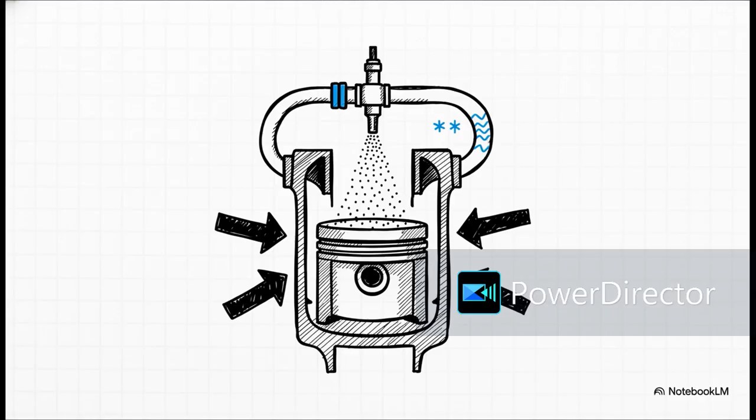Now, to shatter those thermodynamic boundaries, we have to deploy some truly aggressive enablers. We're talking about 500-bar direct fuel injection systems just to achieve micron-level atomization. We need geometric compression ratios pushing past 15:1, and to manage the severe knock limits and that pesky early ignition at those extreme pressures, we have to utilize deep, low-pressure EGR. We're essentially pushing exhaust gas recirculation rates up to 30% just to cool the combustion chamber and suppress NOx formation. It's intense engineering.

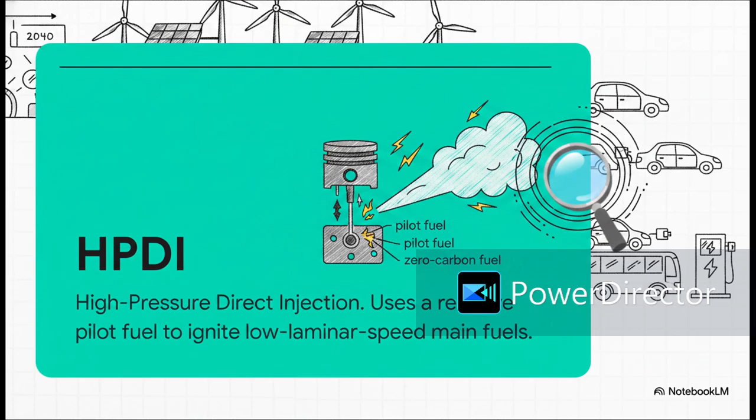Let's shift gears to Section 3, zero-carbon engine evolution. If we're really shifting to zero-carbon fuels, the absolute game-changer here is HPDI, or high-pressure direct injection. This is a breakthrough technology that we absolutely must have to overcome the exceptionally slow flame propagation speeds of alternative fuels. Basically, you inject a tiny amount of a high-reactivity pilot fuel, like diesel, to act as a sort of liquid spark plug. It auto-ignites, creating these high-temperature jets that reliably ignite your main zero-carbon fuel, whether that's ammonia or methanol.

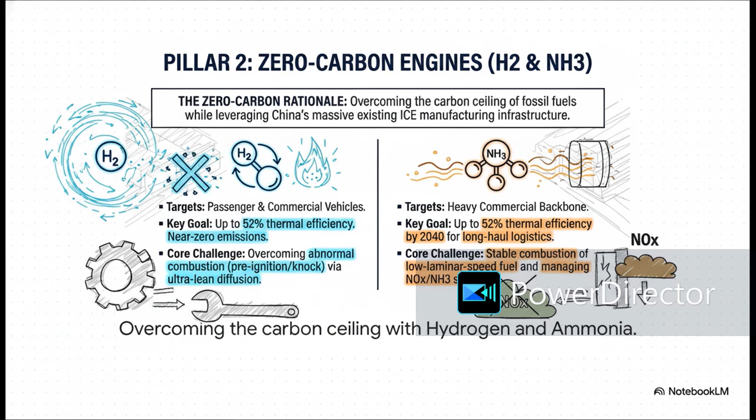Now, hydrogen and ammonia present some incredibly distinct, tricky engineering challenges. Hydrogen demands ultra-lean diffusion to overcome its super-low ignition energy. If you don't get that right, you're looking at severe pre-ignition and backfires, not to mention having to use specialized alloys to stop hydrogen embrittlement. Ammonia, on the flip side, requires us to master the stable combustion of a very low reactivity fuel. Oh, and you have to strictly manage toxic, unburned ammonia slip and N2O emissions. Not an easy task, right?

The evolution path for these zero-carbon engines is actually incredibly clear, and it's moving fast. Phase 1 is mastering port fuel injection, but by 2040, the ultimate limit will be achieved by combining that HPDI technology with stratified ultra-lean combustion and seamlessly integrating liquid hydrogen storage directly into the commercial vehicle chassis.

All right, Section 4, the automotive lightweighting trinity. R&D leaders are facing a massive weight paradox right now. Think about it. Batteries give us range, but their mass takes it right back. Aggressive mass reduction is absolutely no longer just a nice little cost-saving measure. It's a foundational, non-negotiable physical requirement if we want to preserve dynamic range, handling, and commercial payload capacity. So, how do we solve this?

The roadmap prescribes what we call a trinity approach. Structurally, we're shifting away from isolated components toward holistic cell-to-chassis, or CTC architectures, where the battery case itself actually provides the core torsional rigidity. Process-wise, we're using high-yield gigacasting to replace hundreds of individual stampings with single aluminum nodes. And tying the whole shebang together, AI-driven generative design that mathematically strips out literally every single gram of unnecessary material.

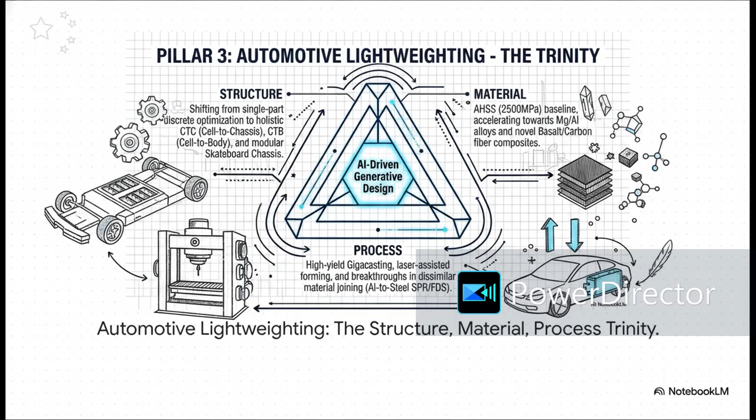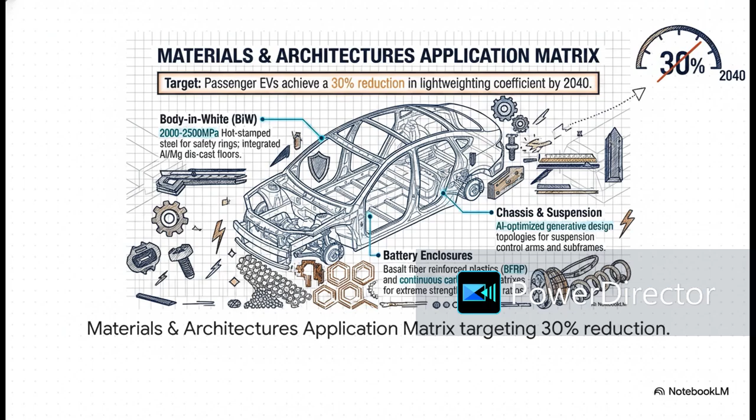When we look at the future body in white, we are targeting a massive 30% reduction in the lightweighting coefficient for passenger EVs by 2040. To hit that, we're applying 2,500 megapascal hot stamp steel for the safety rings. At the same time, we're integrating novel basalt fiber reinforced plastics alongside continuous carbon fiber matrices to get these absolutely extreme strength-to-weight ratios in our battery enclosures.

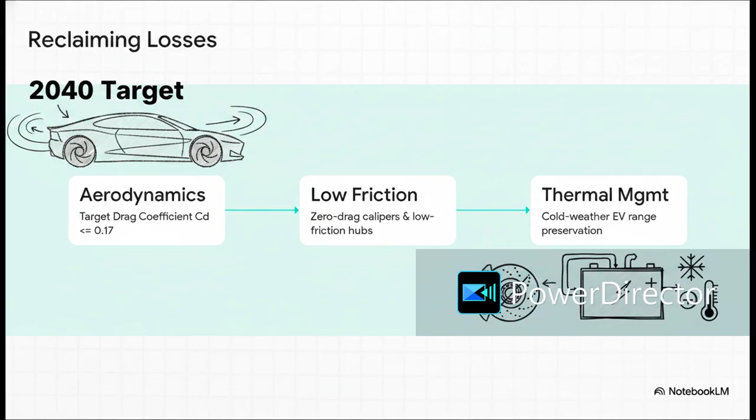Let's move to Section 5, Systemic Vehicle Energy Saving. We have to sequentially attack every single parasitic loss across the entire vehicle envelope. And honestly, the 2040 targets are staggering. We are aggressively pushing aerodynamic drag coefficients down to 0.17 or even lower. We have to integrate ultra-low friction hub bearings and zero-drag brake calipers that have a drag torque of less than 1.5 newton meters. And fundamentally, we've got to completely rethink thermal management to finally stop that awful cold weather range degradation.

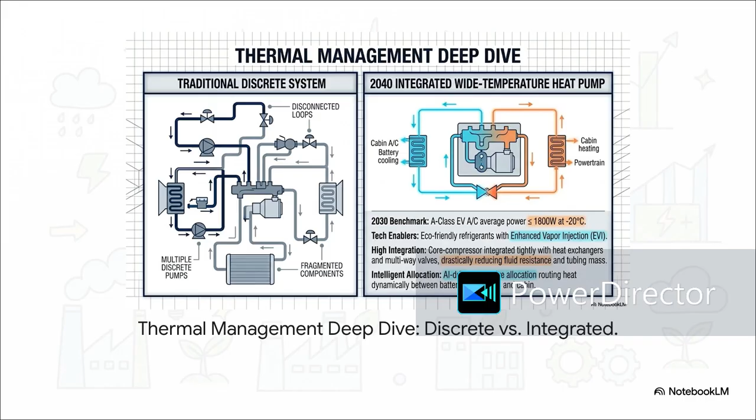The industry is rapidly abandoning those old, fragmented, discrete cooling loops. Instead, we're moving toward highly integrated, AI-driven, wide-temperature heat pumps. By using multi-way valves like an octavalve and eco-friendly refrigerants, the system dynamically scavenges low-grade waste heat from the powertrain and actively routes it to the cabin or the battery. This is exactly how we're going to push cold-weather AC power draw well below 1,800 watts.

And finally, Section 6, Ecosystem Synthesis Imperatives. Look, hardware optimization eventually hits a physical ceiling, right? But think of the 2040 paradigm like an infinity loop. The first three pillars we discussed, powertrains, zero-carbon engines, and lightweighting, they establish the absolute physical capability limits of the chassis. But then, the Vehicle Road Cloud, or V2X software, steps in as the ultimate multiplier. It dynamically extracts maximum utility from that hardware by predicting traffic, optimizing routes, and managing thermal loads in real time.

It's brilliant. Consequently, R&D leaders, you have to pivot. You have to shift your focus from isolated component efficiency over to domain-fused AI platforms. You've got to aggressively invest in multipath infrastructure because pure EV is simply not the sole endgame. And crucially, you have to master the hardest engineering challenges found right in the seams. Things like joining dissimilar materials, say cast aluminum to ultra-high-strength steel, without causing galvanic corrosion. That is where the real battle is won.

Let's wrap this up. As energy saving transforms from a localized, mechanical task into this massively interconnected digital and physical ecosystem, I want to leave you with this final thought. Hardware sets the baseline, for sure, but software is the multiplier. So, are your engineering architectures truly prepared for the 2040 realities?

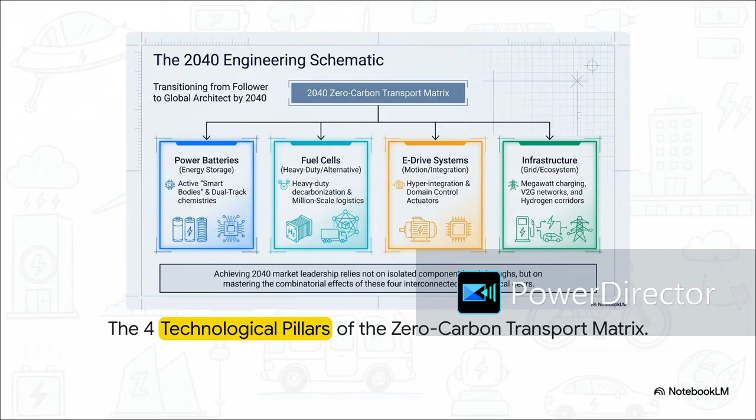To tackle something this massive, we're going to apply a strict MECE framework, mutually exclusive, collectively exhaustive. We'll hit 4 specific pillars: power batteries, fuel cells, e-drive systems, and infrastructure. And then we'll tie it all together by looking at the ultimate 2040 ecosystem convergence. This matrix is basically your blueprint. It visually drives home the point that achieving market leadership in 2040 relies entirely on mastering the combinatorial effects of these 4 interconnected gears. You can't just win at battery chemistry and drop the ball on grid integration. The zero-carbon transport matrix demands simultaneous mastery across the board.

All right, let's start with Pillar 1, power batteries. This is where the strategic mandate forces us into a really fascinating dual-track paradigm. The divergence here is just stark. The industry isn't chasing one single, unified goal anymore. On one track, we're pushing solid-state chemistry to its absolute physical limits. We're talking energy densities well over 700 watt-hours per kilogram. But on the flip side, on the cost-effectiveness track, the mandate is to ruthlessly crush costs down to under 0.30 RMB per watt-hour by hyper-optimizing liquid lithium-ion systems.

It really makes you stop and ask, where exactly does your current R&D pipeline fit into this split? Now, tracking that high-density route requires a highly specific, multi-step material evolution. We're stepping away from today's liquid NCM and graphite setups, moving into a semi-solid integration phase that relies heavily on lithium-rich manganese and high-capacity silicon carbon anodes.

And then, finally, by 2040, we fully cross the threshold into all solid-state systems utilizing pure lithium metal. This timeline is dictated purely by material physics. For example, hitting an ionic conductivity above 2.0 × 10^-2 S/cm for sulfide-based solid electrolytes is literally the physical gateway. If we don't hit that exact material metric, those 2040 solid-state targets remain nothing more than a theoretical fantasy.

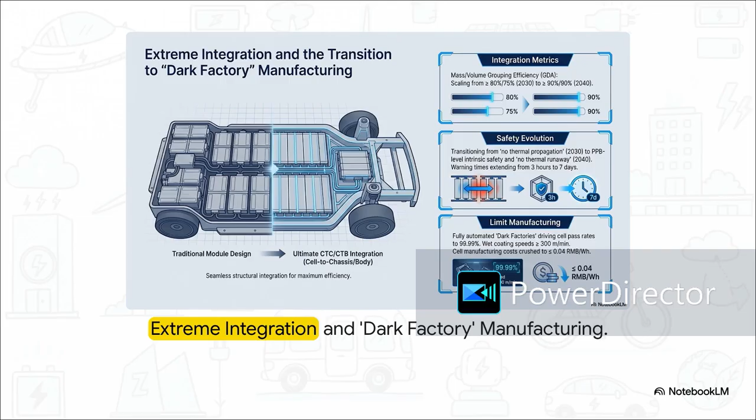Switching gears to the high cost-effectiveness track, it's not really about chemistry. It's all about extreme packaging and next-level manufacturing. We're aiming for 90% mass and volume grouping efficiency through pure cell-to-chassis integration. And to hit that staggering 0.04 RMB per watt-hour manufacturing cost, you've got to rely on fully automated dark factories. We're talking lights-out operations, blazing fast speeds, and a 99.99% pass rate.

Moving on to Pillar 2, fuel cells. The roadmap is crystal clear here. This is our endgame specifically for heavy-duty commercial decarbonization. Hydrogen isn't some blanket fix. We are isolating it for those brutal, continuous operation logistics corridors, where heavy batteries would totally kill your payload capacity.

For a 49-ton heavy-duty truck, the 2040 targets are wild. Over 4 million operational fuel cell vehicles, minimum 1,000-kilometer ranges, and pushing their durability to a 2 million-kilometer lifespan. Oh, and keeping hydrogen consumption strictly under 6 kilograms per 100 kilometers.

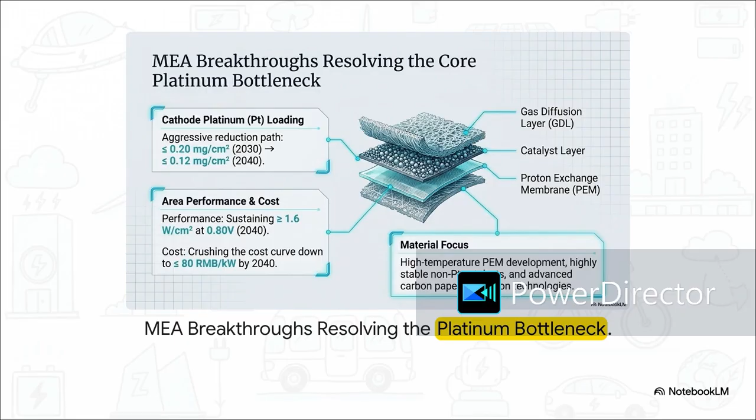To actually pull that off commercially, engineering teams have to crack the platinum bottleneck right at the membrane electrode assembly level. The mandate is a microscopic cathode platinum loading limit of 0.12 milligrams per square centimeter by 2040. To hit that, we're going to need massive advancements in high-temperature proton exchange membranes and totally stable non-platinum catalysts.

Let's tackle Pillar 3, e-drive systems. Here, we are witnessing a radical shift from standard mechanical packaging to pure silicon-level hyper-integration. Those legacy decentralized powertrains, they are officially dead. The future is entirely unified, multi-in-one domain control units. We're treating e-drives as silicon-level computational actuators now.

By leveraging multi-core microprocessors and wide bandgap semiconductors like silicon carbide, we're targeting a volumetric power density of 70 kilowatts per liter by 2040. It's honestly just like the leap we saw in computing decades ago, going from mechanical sprawl to incredible processing density. Mechanically, this translates beautifully into distributed drive engineering.

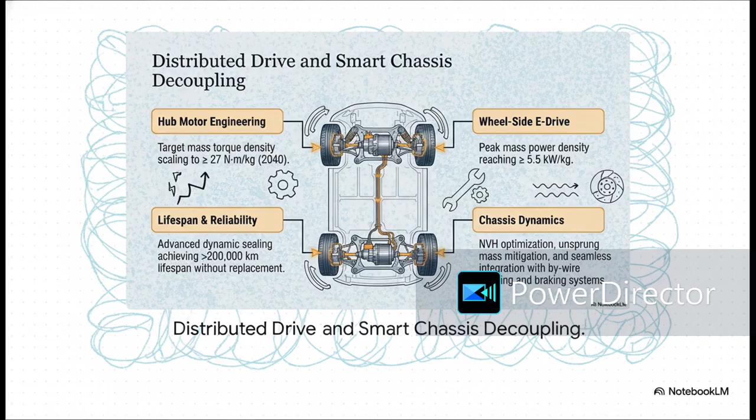We are pushing toward wheelside and hub motor architectures with mass torque densities beyond 27 Newton-meters per kilogram. This fully decouples the chassis dynamics, letting us seamlessly drop in by-wire steering and braking. Imagine the freedom this gives us. We can completely revolutionize vehicle handling and massively open up the interior cabin.

Our fourth and final standalone pillar is infrastructure. Get ready for the V2G revolution, where we stop treating EVs as a burden on the grid and start treating them as highly profitable assets. By 2040, we're looking at a very distinct dual-track energy network. On one hand, we're building massive hydrogen logistics corridors, deploying up to 20,000 targeted stations for heavy transport.

Concurrently, in urban environments, we are transforming standard charging piles into smart, bidirectional nodes. We are basically turning city grids into massive virtual power plants. The aggressive scaling mandate here is what you really need to take note of. Hitting over 80% vehicle-to-grid or V2G penetration by 2040 means fleets will automatically absorb off-peak renewable energy and shave those peak grid loads when demand spikes.

Your vehicles literally become prosumers, producing and consuming energy on the fly. They aren't just getting you from point A to B anymore, they're rolling power utility nodes. So having verified the requirements across all 4 pillars independently, let's move to our final section, synthesizing them into the 2040 ecosystem convergence.

It's glaringly obvious that the 2040 market is going to belong exclusively to whoever masters this exact convergence. The ultimate vehicle is no longer a hardware product, it's a software-defined node that seamlessly interlocks smart solid-state batteries, fuel cell networks, computational e-drives, and V2G infrastructure. Unifying that entire shebang with AI and digital twins, that is how we actually minimize the lifecycle carbon footprint at a macro scale.

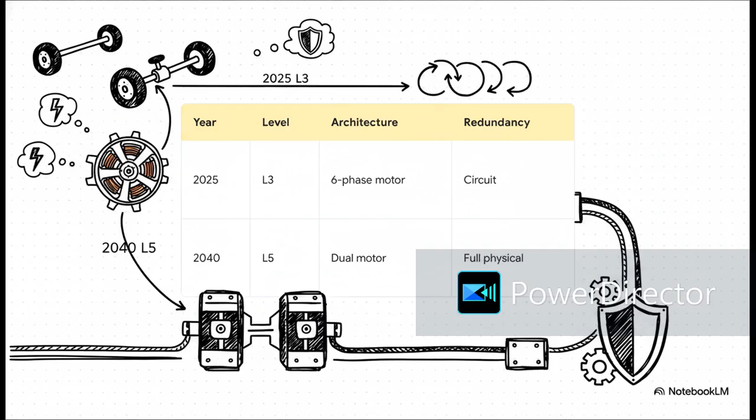Right now, looking at 2025 standards for Level 3 autonomy, a 6-phase motor with basic circuit redundancy does the job. But fast forward to 2040, aiming for full Level 5 autonomy, and the entire paradigm shifts. It demands absolute fail-operational capabilities. We are talking dual motors, totally independent control systems, and full physical and logical redundancy from top to bottom. It's a massive leap in engineering rigor.

Moving up the stack to Section 3, EEI, or the Electronic, Electrical, and Information Architecture, the central nervous system. We're tracking a really radical evolution in topology. We're actively moving away from the legacy distributed ECU model, where a car was essentially a messy network of 100 isolated black box computers. We transition to a central compute and zonal architecture by 2030. And the endgame for 2040? A fully vehicle cloud centralized architecture where massive computational loads are handled entirely elastically in the cloud.

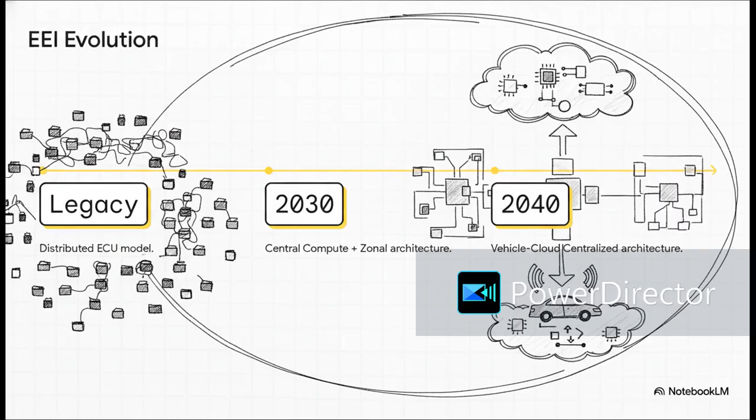Now, why does this matter so much to us as engineering leaders? What's the bottom line? It's agility. By structurally decoupling the hardware and software lifecycles through a service-oriented architecture, we completely shatter legacy development limits. By 2040, these fully virtualized networks are going to compress feature development cycles down to just 1 week via AI-driven agile development. You are literally going to be updating a 2-ton kinetic machine with the exact same speed and ease as updating a smartphone app.

Which brings us to Section 4, auto chips. These are the exponential silicon synapses providing all the raw computational horsepower. The gap between legacy chips we're used to and the 2040 requirements is honestly staggering. To support true in-car artificial general intelligence, we're demanding a compute threshold exceeding 2,000 TOPS. But as we all know, power means absolutely nothing without reliability. We are enforcing a strict zero-defect tolerance of less than 0.2 parts per million. Think about that. You are essentially engineering a world-class supercomputer and shoving it into a high-vibration, temperature-extreme oven.

Securing this kind of hardcore silicon ecosystem requires 3 absolute dependencies by 2040. Number 1, architecture autonomy. We have to establish open-source standards like RISC-V to break our reliance on proprietary instruction sets. Number 2, fabrication nodes. We need to master 22 to 16 nanometer embedded memory and advanced 3D packaging to get around the memory wall. And number 3, tool chain independence. We must completely transition to automotive-grade EDA tool chains.

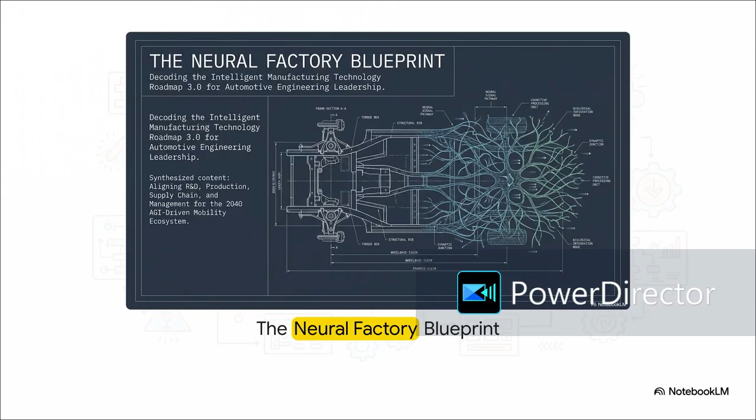Think of the factory as an industrial mother machine, literally a living, breathing entity. It runs on a continuous, bidirectional flow of data. The factory builds the smart vehicle, and then, boom, the vehicle's real-world telemetry data flows right back to upgrade the factory. It's a flawless, closed, symbiotic loop.

Honestly, if your current manufacturing architecture is still just messing around with basic networking, you are already miles behind the strategic curve. So, to really operationalize this for you, we're going to break it down using a top-down MECE approach. That's mutually exclusive, collectively exhaustive. We'll hit 1. Genesis and governance, 2. Physical realization, 3. Value network, 4. Market and sustainability, and finally, 5. Synthesis and strategy.

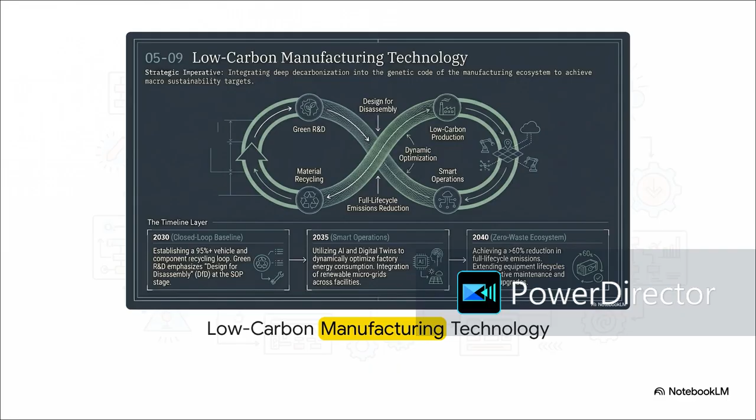All of this ladders up to a massive quantifiable mandate, a greater than 60% reduction in full life cycle carbon footprint by 2040 compared to 2024 baselines. And listen closely, that is full life cycle. We are talking Scope 3 emissions here. You can't just slap some solar panels on your factory and call it a day. You have to architect a fully carbon-accountable supply chain, utilizing PLM systems and blockchain verification to guarantee absolute auditability.

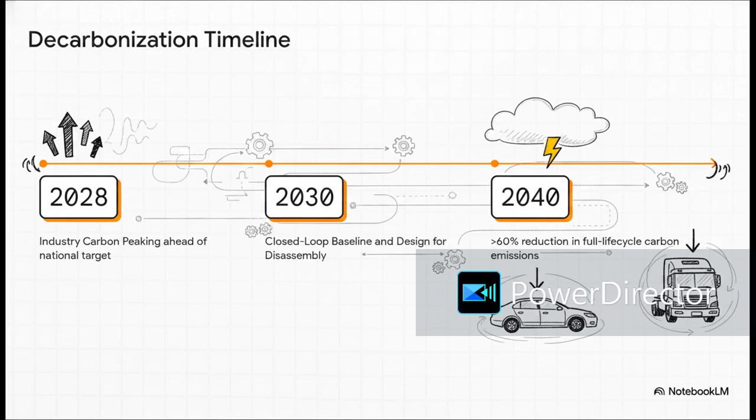And the timeline? It's incredibly aggressive. It demands the entire industry achieve carbon peaking ahead of national targets by 2028. It also requires rigorous Scope 3 lifecycle tracking to hit those 2040 reduction goals. By 2040, new passenger car carbon intensity must drop by 60%, and heavy-duty 49-ton trucks must drop by 41%. These aren't just suggestions. These are hard engineering targets, and they require immediate action in your system design phases right now, today.

Finally, Section 5, Synthesis and Strategy, the path forward. We've meticulously drilled down into all four MECE layers, the brain, muscle, nervous system, and impact. Let's pull it all together into some actionable strategic imperatives for your teams. To truly weaponize your core data assets, you absolutely must eradicate functional silos. You have to architect open, cross-industry ecosystems and relentlessly invest in digital talent and systems architects.

A mechanical engineer today, they need to understand data ontology. A software engineer, they better understand hardware constraints. You are no longer just building cars, my friends. You are cultivating self-sensing, self-optimizing, intelligent mobility organisms. Because make no mistake, the transition to IM4 isn't just a neat little operational upgrade. It is an extinction-level event for linear manufacturing models. Those who cling to siloed data and rigid assembly lines, they will be mathematically eliminated by 2040.

So, I'll leave you, the automotive engineering leaders of today, with this one critical question. Is your engineering architecture truly prepared for self-evolution?